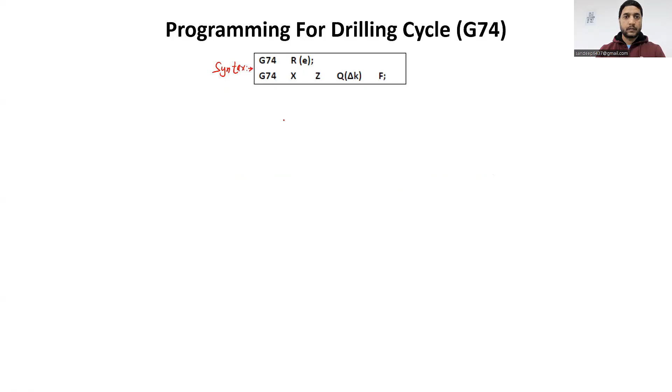So in the G74 cycle, we have two lines. And let me write this, that this is the syntax for our drilling cycle. Now let me explain this syntax line by line. So as you can see here, in the first line, it is written G74 RE. And RE stands for return amount.

Then Z is the drill depth, how much depth we are providing in order to make the holes. Then Q is the depth of cut in the Z axis in mm or micron. This is the depth of cut in the Z axis. And F stands for feed rate in mm per minute or mm per revolution.

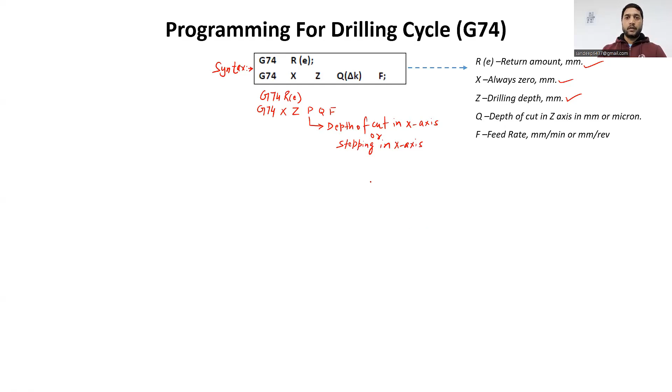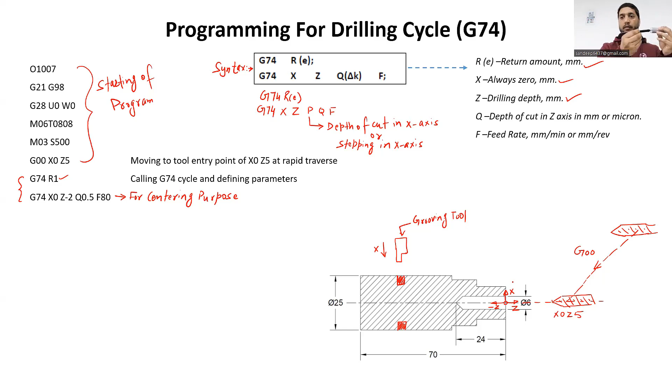Now there are chances that this cutting tool, when it comes in contact with the workpiece, may deflect from the center. So in order to avoid that situation, we are making a hole of, let us say, 1 mm or 2 mm at the center of this workpiece, so that when the next cutting tool comes and performs the machining operation, it will not deflect. There will already be a small hole, or a position for this cutting tool, and it will not deflect from this center point. So I hope you are clear why we are doing this centering.

After that, we have G28 U0 W0. It means now we are sending the cutting tool to its home position. Then we have a machining code for tool change. Now we are changing the cutting tool here, and we are calling tool number 4. Initially, we had tool number 8 here, you can see. Now we are calling tool number 4, rotating the spindle again with 500 RPM, and keeping the tool at X0 Z5 with rapid traverse. So now the next cutting tool will be at this particular location.

And we have this drilling cycle again. So we are calling the G74 cycle and defining all the parameters again. The retraction amount, we are taking 1 mm again here. G74 in the next line, X0. Always we are taking X0. Now we are taking drill depth here, this 24 mm.

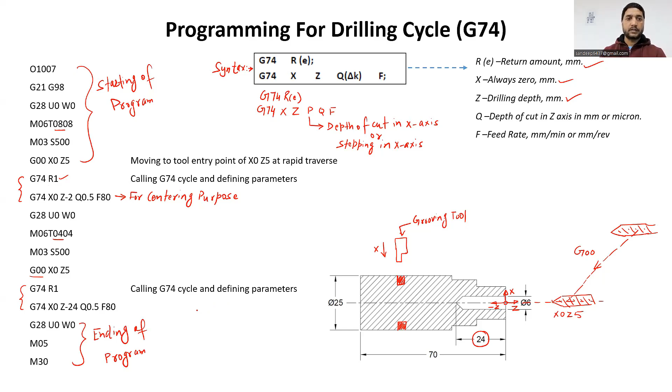This is already written here, the starting of the program. And from here to here, this will be our profile program. Now, I hope this drilling cycle is clear to you. In order to understand this better, let me run the same program in a simulator. This is our CNC train simulation system. You are already familiar with this. On the left hand side, the same program is written which I was discussing with you.

There are little modifications here. In the first line of the drilling cycle, G74 R1.5, so the retraction amount I'm taking here is 1.5 instead of 1. Then in the second line, G74 Z-20, I'm taking drill depth as -20 mm. Q is 1000, and this value is in microns, so 1000 means 1 mm depth of cut, or stepping in Z axis of 1 mm, and the retraction of the cutting tool is 1.5. So 1 mm, 1.5, 1 mm, 1.5, just like this. And feed we are taking in mm per minute here.

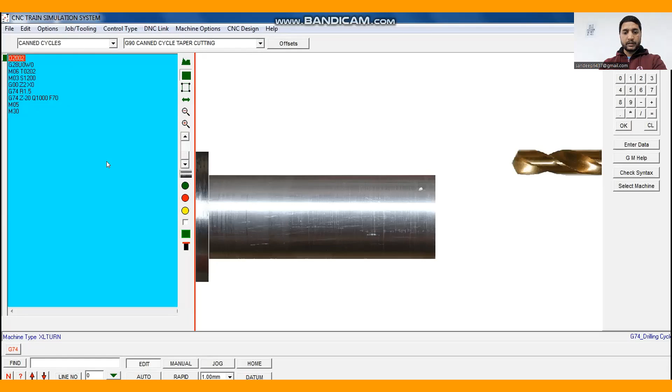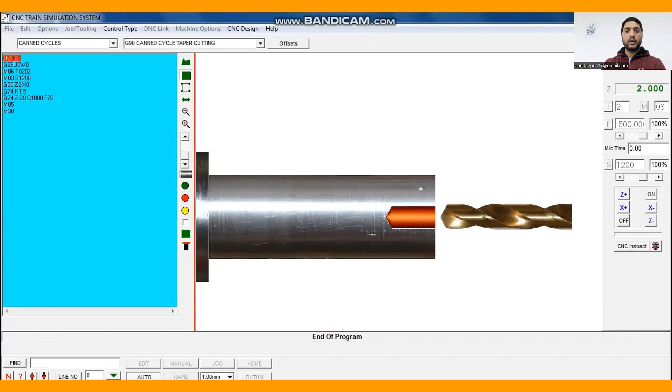Now let me run this simulation and see how it will make the hole. The cutting tool is coming from its home position, this is the position of X0, and Z we are taking here as 2. After that, it will perform our drilling operation. So this was the simulation for this drilling cycle. In this program, we have not taken a centering operation, so let me introduce you to another simulator where we will do the centering operation also, and after that the same drilling operation.

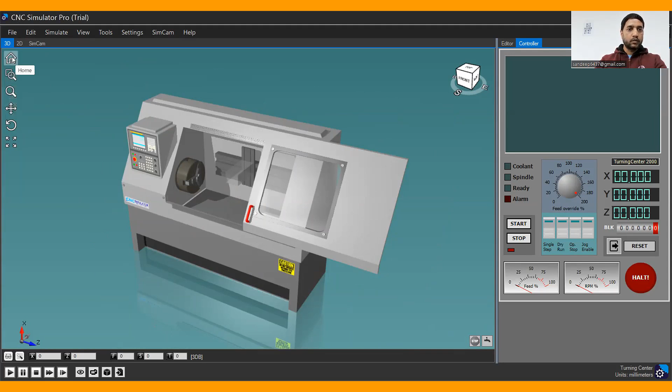This is one of the CNC simulators, whose name is CNC Simulator Pro. I'm using the trial version right now. If you want, you can use this simulator because it is a very good simulator. Let me make you familiar with how you can use it. On the left hand side you can see different icons: home, zoom window, zoom, and so on. When we press the home button, it will be like this. This is our zoom window; it will zoom a particular window which we grab like this.

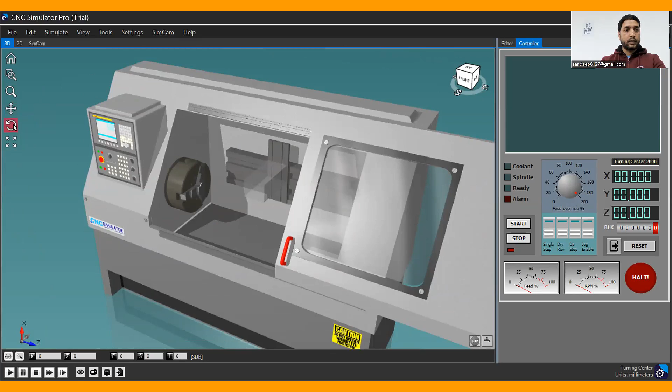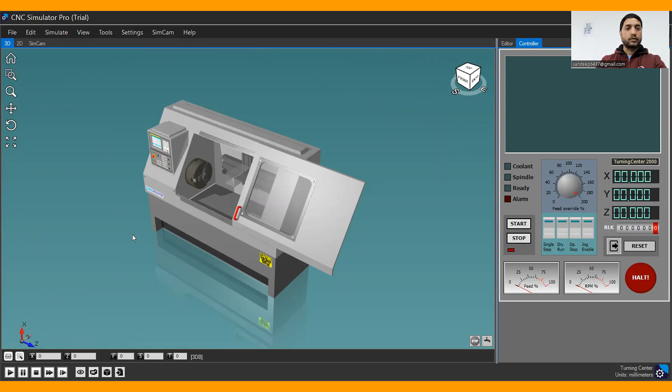Then we have zoom. When we press the zoom icon, it will zoom out and zoom in on our machine. Then we have pan; with the pan we can go left and right, up and down. This is our rotate icon; we can rotate with this feature. Then we have zoom fit, which will fit the machine to this window. We can also use all these functions with our mouse. If we scroll the middle mouse button, it will zoom in and zoom out. If we press the right mouse button, it will pan left, right, up and down. And if we press shift and the middle mouse button, it will zoom in and zoom out.

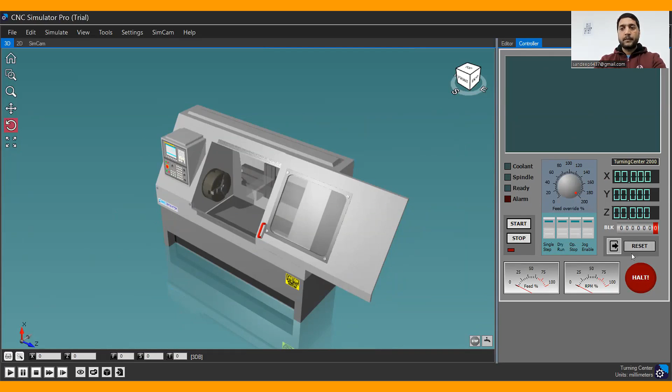On the right hand side you can see our controller, the same controller shown here. We can control our machine from this controller. This is your X, Y, and Z axis. This is start; when we start our program or machine, we press this button. We can stop also, and reset the machine from here. We can shut the door from this button and open the door from here. Then this is the editor, where we will write our CNC program. After that, we have some more options here.

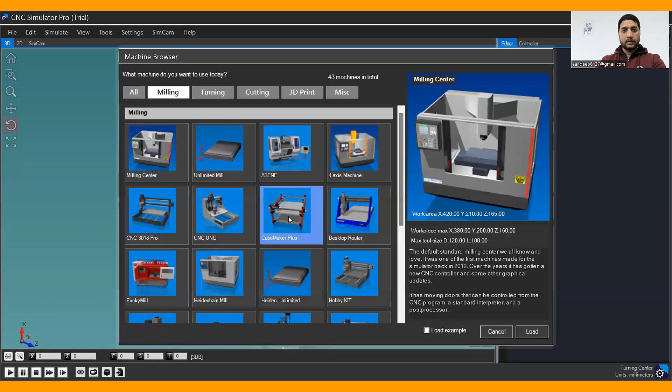Let us say I'm using open machine. Here we have different kinds of machines, like milling machines; turning machines are there, cutting machine, 3D print.

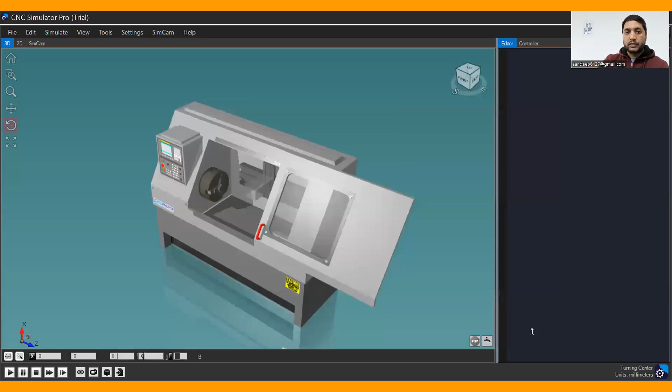Then we have some miscellaneous machines over here. But we are interested in the turning machine because we are working on this CNC turning programming. And in turning machine, we are taking the turning center machine, and you can load that machine also. So when you load, it will come up just like this. After that, you can go in the file option and you can open your CNC program.

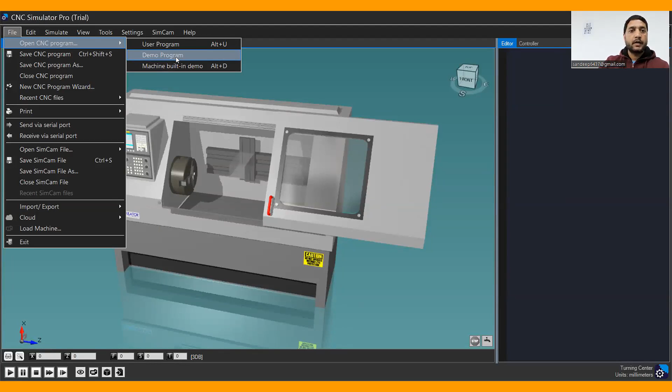Okay. So there are three options here in open program: user program, demo program, and machine built-in demo. So these both are basically for us for demo, how the CNC simulator will work here. And this is the user program. Here you will find the program which we have written. So let me just load G74 here.

So the program which is written here, we have loaded the program. These are the initial settings. That is, all the dimensions are in mm. This is the lathe machine, and this is the part. I'm basically taking part number 1. So there are 5 parts you can see here: 1, 2, 3, 4, 5, and I'm using part 1. Or you can directly right click on this part 1. Okay, let me show you all these parts.

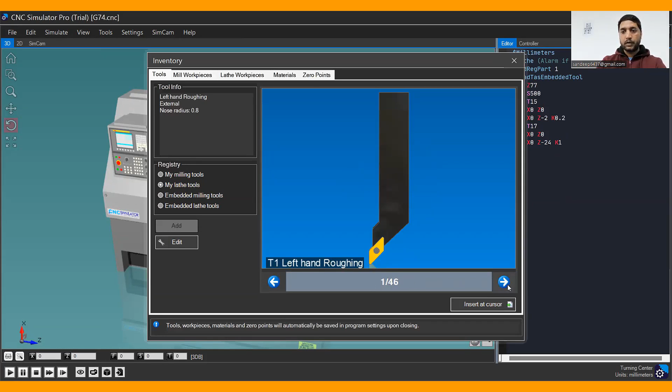If you go in the settings and open your inventory, here you can see our tools. Different types of tools are here in case of the CNC turning machine. There are total 46 tools here. This is T1. T1 stands for tool number 1, left hand roughing tool. Then we have T2, left hand finishing tool. So you can find different types of tools here.

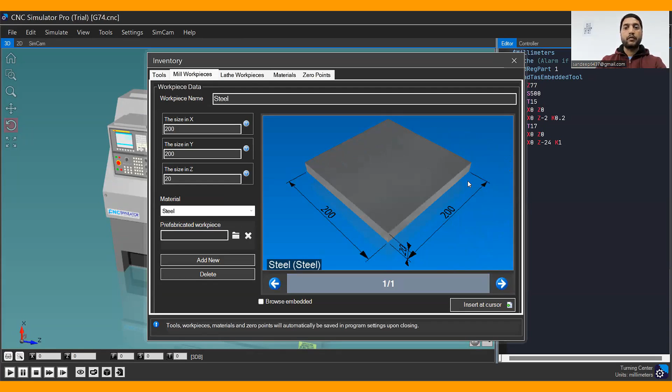After that, we have some milling workpieces that we are not covering here. When we start our CNC milling programming, you will see that we have such types of workpiece, like a square workpiece or a rectangular workpiece with some length, width, and thickness. Then we have lathe workpieces. Here we are interested. The cylindrical workpiece for which we were writing our program had a diameter of 25 mm and length of 70 mm. So here we are taking length as 100 mm.

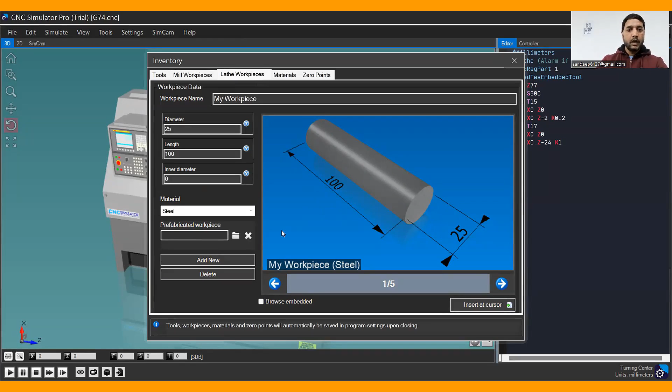If you want, you can add a new workpiece from here. Let us say I'm adding a new workpiece. I'm taking a diameter of, let us say, 50 mm, and length 100 mm. So when doing this, it will load the workpiece with these values: 50 mm in diameter and 100 mm in length. You can see here. And you can give the name also. Let us say this is workpiece number 6.

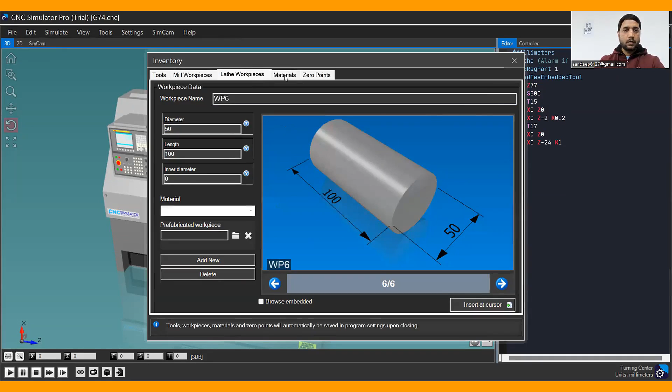And after that, from here, you can select the materials for your workpiece. You can choose any color from here. All these colors are here. Let me keep this color. And you can select the material also, like metal, plastic, wood, plain. Let me keep this metal.

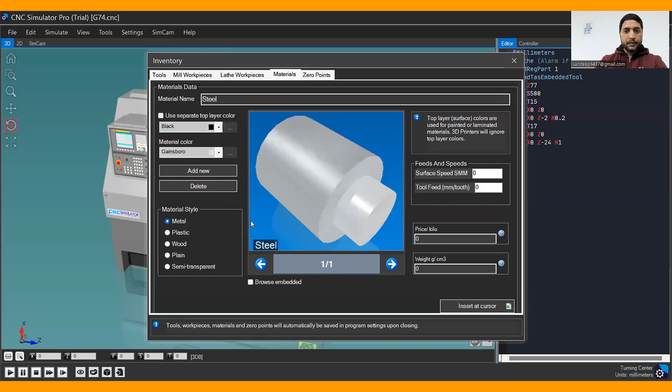Now, after closing this window, if you go here and check your part, now there are a total of 6 parts here. So I'm taking part number 1 here, whose diameter is 25 and length is 100 mm. You can simply type 1 here and click on this. It will load that particular part here. Then this is the program which I have written here.

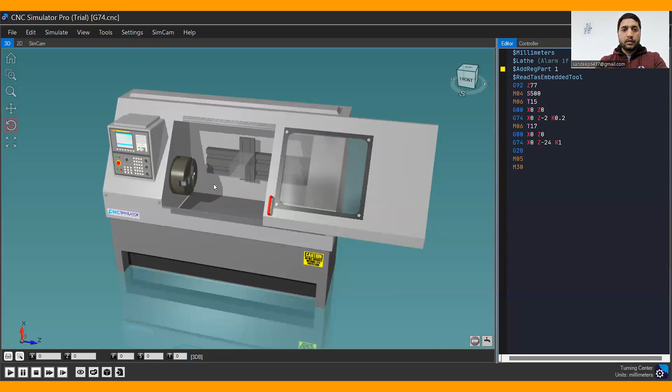Let me just explain this G92 Z77. By default, the machine is taking this point as 0, 0. If you want to check this, you can check from here. See, this is your 0, 0 point. But as per our program, we want to take this point as our 0, 0. And for taking this point as our 0, 0, we need to specify this.

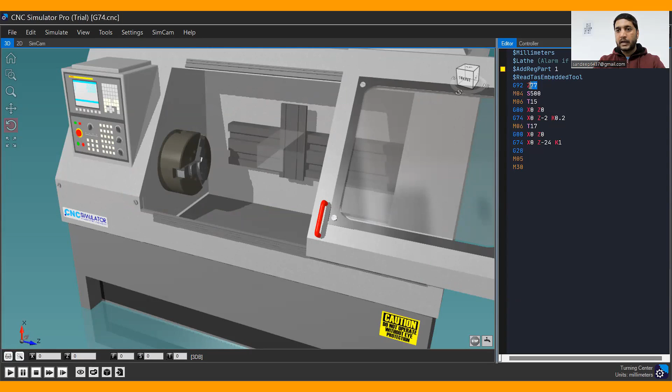So by using code G92 here, I'll check it here. G92, set zero offset. So I'm setting the zero offset of Z at 77. Let me explain this. If you go here in the help, and you go in online help, let me show you why I'm taking Z77 here. So let us press online help.

After pressing the online help, here we have the CNC Simulator Pro user guide. And if you go here in simulation tutorials, let us say I'm going in tutorial 2 of CNC turning machine. This is the full tutorial. You can see here. If you want, you can refer to it.

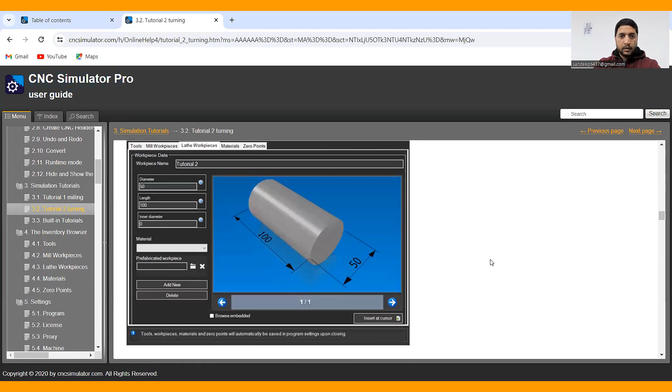Okay, how you can load the workpiece, everything is here. But I'm interested to show you this part. Okay, this particular part. CNC Simulator Pro automatically puts the 0 point at the right plane of the jaw. Okay, so this is the right plane of the jaw. So it is by default putting your 0, 0 at this particular point. And total length I'm taking here 100. Okay, so 0 is here at this particular point.

The distance from the plane to the spindle is 23 mm. From here to here it is 23 mm. That means that the right end of our 100 mm long workpiece is at 100 minus 23, that is at 77. So from here to here it is 77. So by default, your work coordinate system is at this particular point.

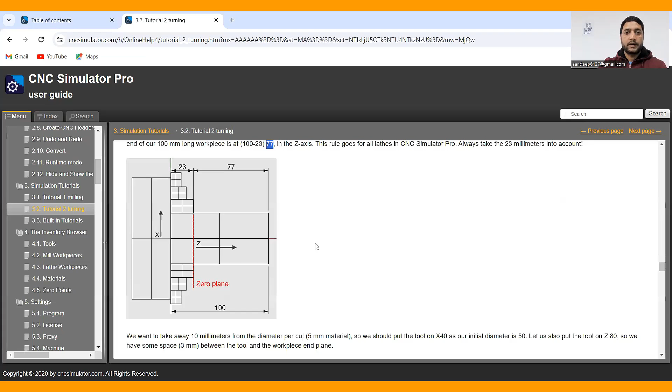But if you want to change your work coordinate system, then you can put G92 code here and you can give the value of Z, that is 77. So this point will be now your 0 point, Z0. So I hope now you are getting clarity why I'm taking G92 and Z77. So that's why I'm taking Z77 over there. Now let me get back to the simulator. Okay, so I hope now it is clear to you.

Then we are writing our program. We are basically rotating the spindle in counterclockwise direction with 500 RPM. Okay, and we are taking all these tools. Then the program is same, but here we are only using one line for G74 cycle. Kindly remember this. As per this CNC Simulator Pro, we are using only one line X0 Z. This is for centering purpose Z-2, and this is basically your forward motion of the cutting tool. That is, you are going 0.2 mm ahead in the forward direction.

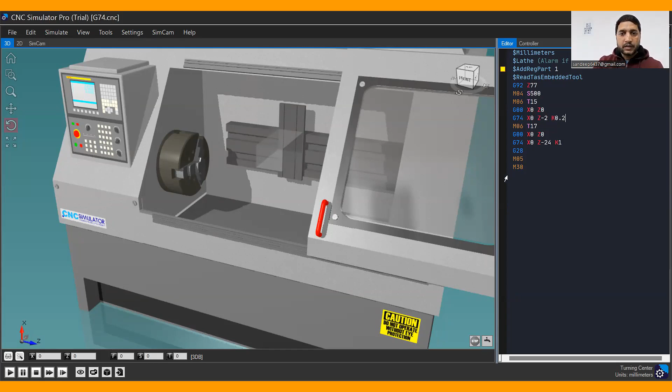So let me just run this program for you, then it will make clear. Go to the controller, reset, and then start. Let me just, yeah. See, now the cutting tool has changed and now it is moving in the direction of Z minus 9, minus 10, up to minus 24 it will go.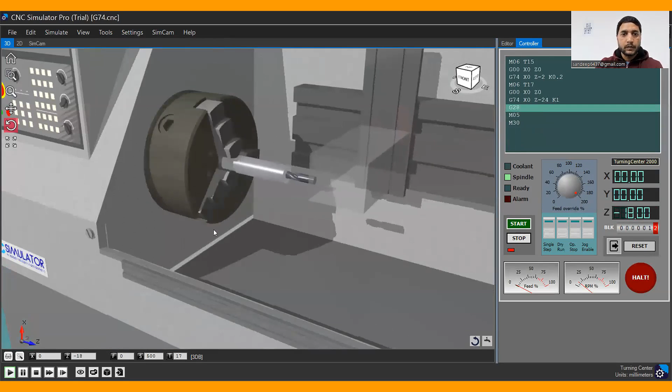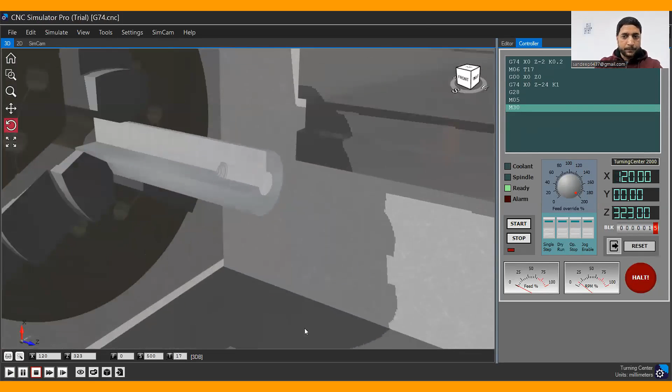Now, if you want to see, you can check the inside view of this workpiece here. If you see here, you can check the inside view. Now, let me run this program by showing you the inside view. This is the first tool making the centering operation up to 2 mm. You see, then the next drill bit, or next cutting tool, is coming in the position. Now it is going in the forward direction.

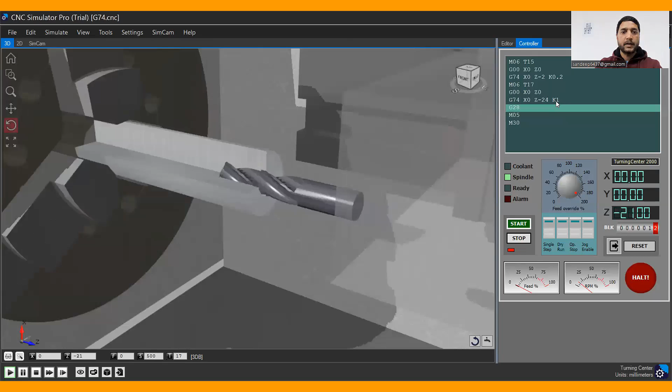This K1 stands for your depth of cut in Z-axis, or stepping in the Z-axis. Now suppose I'm going to change this K1. Let us change this K. Here I'm taking 5, let us say. So now you can see the difference. Let me reset it and start the program.

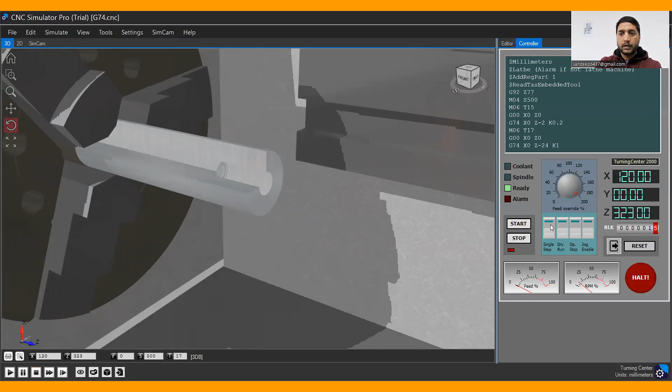Only the depth of cut. This is taking 5 mm depth of cut. See, you can see the difference here. Now, I hope this is clear to you how we can work on this CNC Simulator Pro. If you want to explore more of this CNC Simulator Pro, you can explore it. You can go in the file mode. Okay, you can open the demo programs. There are so many demo programs over here.

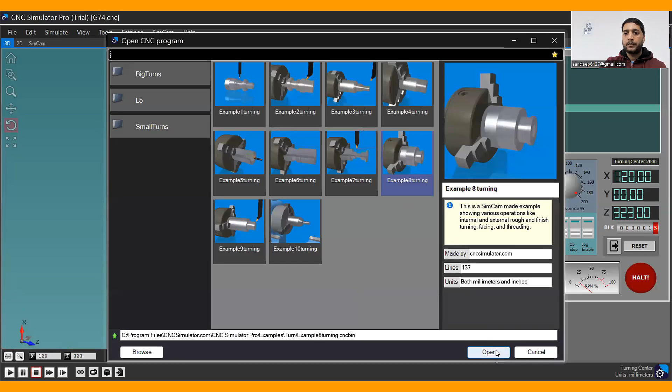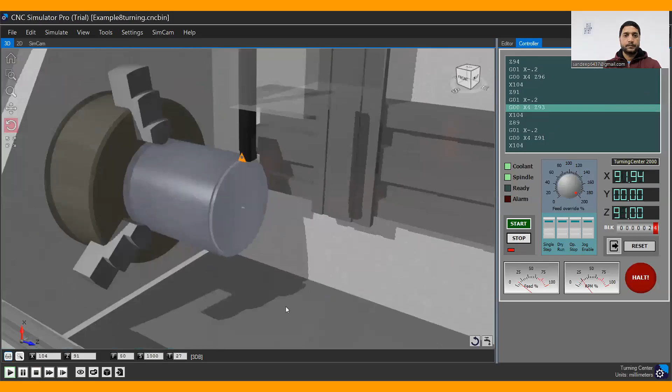If you run any one program, let us say I'm running example number 8. So this is saying save changes to current CNC program. Okay, yes. And then let us run the demo program. Then start. Now I'm showing you the demo program. See. This is the facing operation. Another tool is coming. It is performing the turning operation. This is the grooving operation.

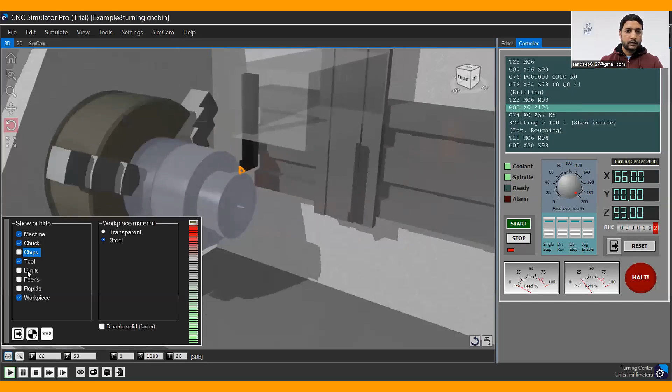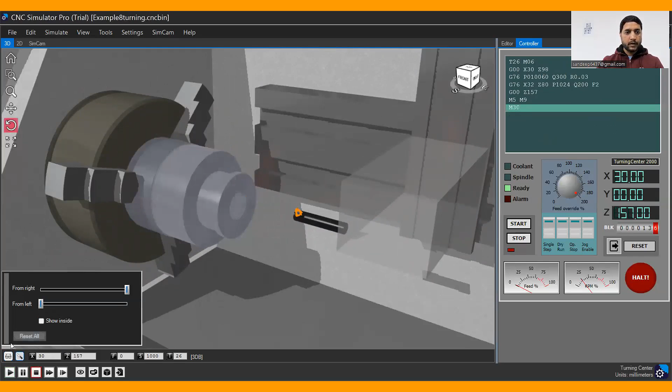There are more settings here. If you want, you can check the chips removal. You can see the limits. You can see the rapids. There are so many things over here. If you want, you can check all these. Let me run the same program again for better understanding.

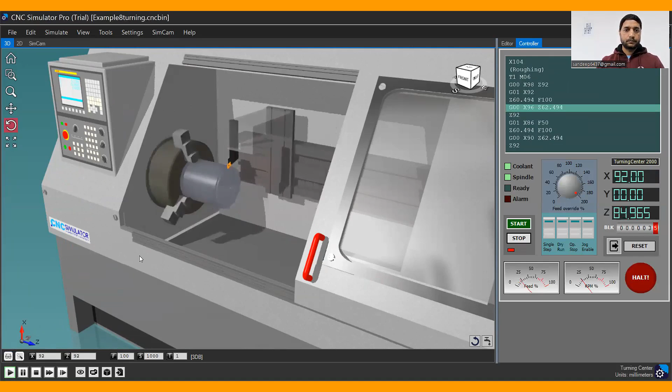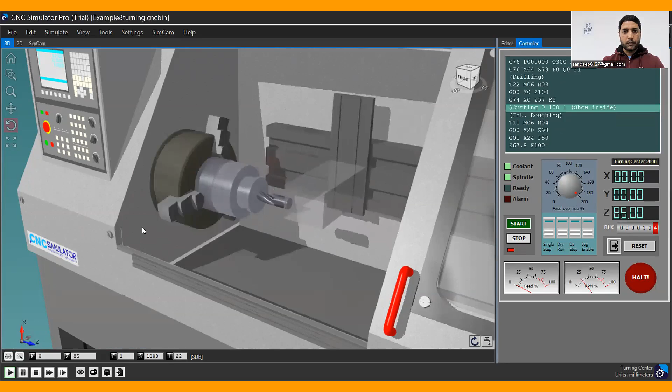If you want, you can close the door. It's up to you. This is the drilling operation. Check here, Z. You can check here, G74 X0. Yeah, this is boring operation. So I hope now this is clear to you.